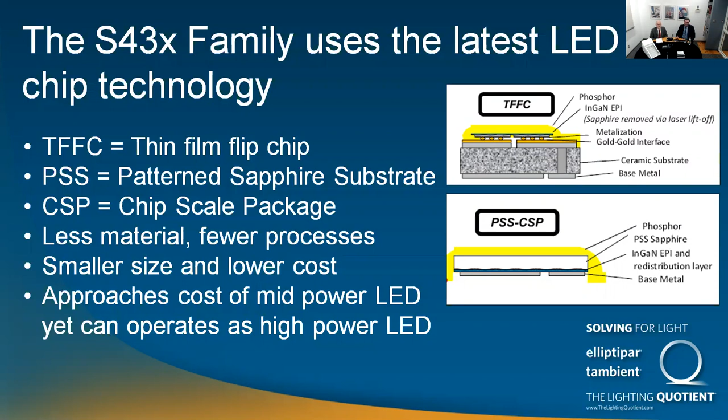Typical flip chip will diminish in light output as you ramp up the current density.

It will increase, but not at a linear rate, and that's what's known as droop. This chip will experience much less droop, so you can drive it harder and still get more light output.

The other thing unique about this chip is that it emits light from 5 sides. Rather than just the top emitting light, all 4 sides are emitting light too. This created a challenge for designing the optics, so we came up with a new optic design which still works around a single optical center, but it wraps completely around the LED so we can make use of all the light, including the light coming off the sides. This is a new optic, and we do have US and foreign patents pending.

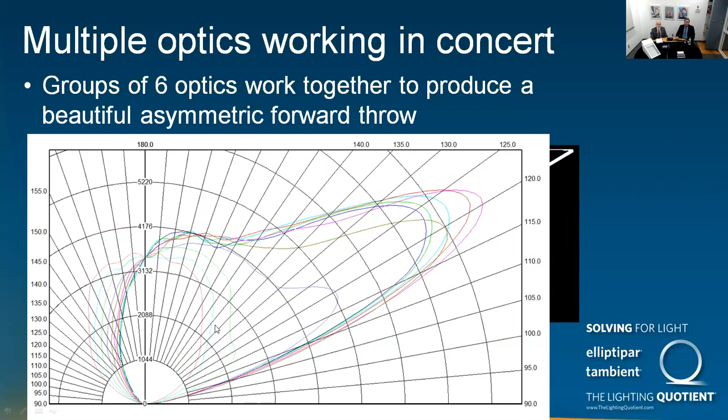Now, when we use them all together, in the case of the 430, we're using 6 of these optics in a row, kind of like stadium seating, so they can see over each other. It produces a nice asymmetric throw, very elliptipar-like, with a very sharp peak candle power that runs back quickly to 0, so there's very little wasted light downward or trapped by the visor.

This is a quick view of the light engine. You can see the chips are different than what you've probably seen in the past. They're very small. In this case, we're using 18 of the flip chip whites in series on a 6-inch board. The light engine itself is an extruded aluminum material. It's bright anodized, which helps with emissivity to release heat away from the LED, as well as reflect light that might otherwise go in the wrong direction, and reflects it back out of the fixture.

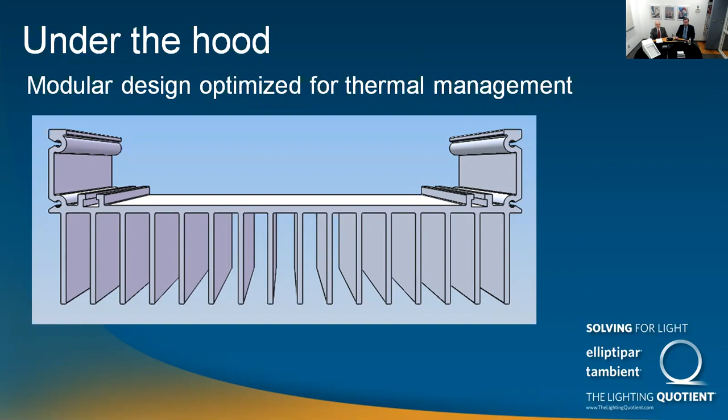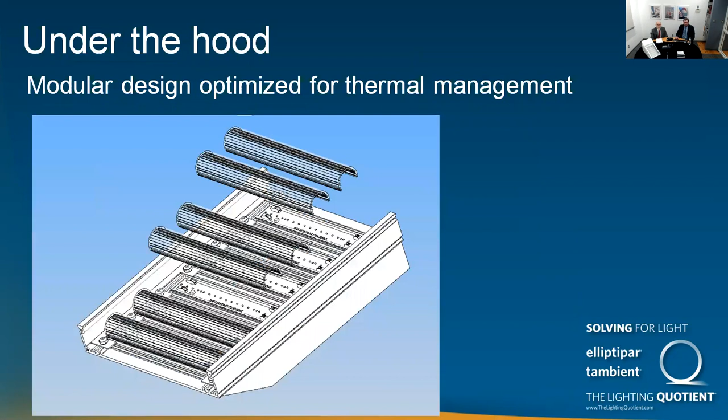Now, taking a closer look under the hood, it's a modular design. We're using a heavy extruded aluminum body to promote convection to cool the LEDs, and it's miter cut in the front, which we'll show you towards the end when we hold up the sample. The light engines are placed and mounted directly to the heatsink, and then the optics are placed over each individual light engine.

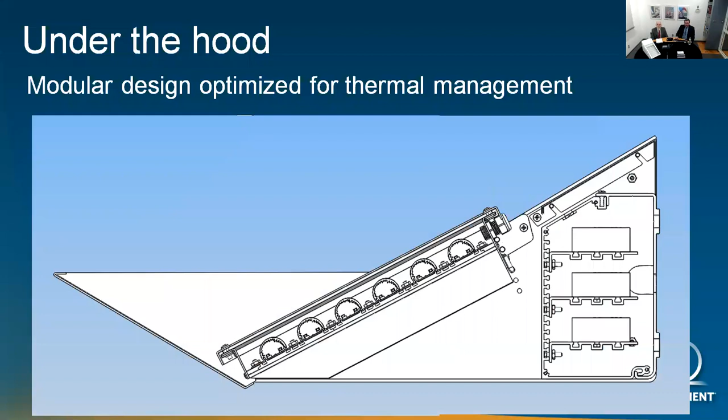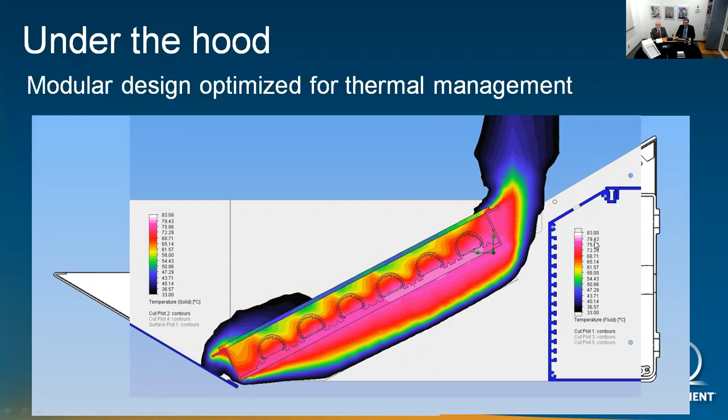This is showing all 4 of them in a 434. When we were designing it, we used SolidWorks, one of the programs we use, but it also has an add-on feature for FloWorks, which is thermal studies. This is one of the studies we were looking at when designing it, and you'll notice the highest temperature we're seeing is around 79, 80 degrees. When we actually built the fixture and measured the temperatures, it was spot on right at 79, 80 degrees. So it was good to see that the design efforts we put in at the beginning paid off in the actual design itself.

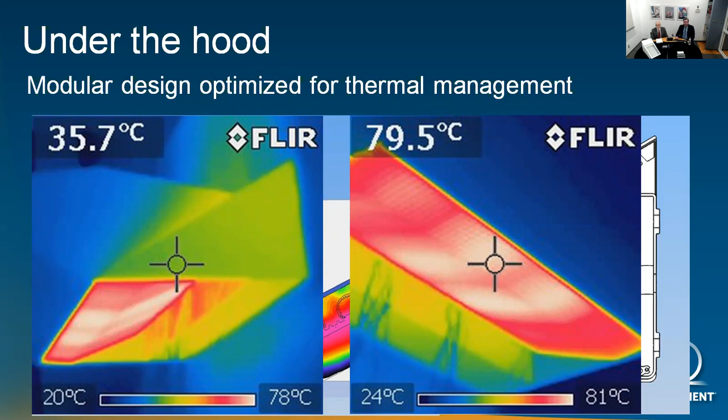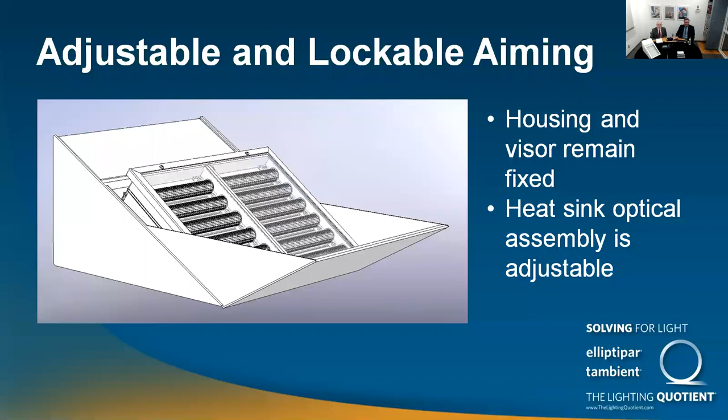The other feature we have, we call this an ensconce line, similar to the old ensconce where you'd have a shroud mounted to the wall and the optics inside were aimable, so you could aim it forward for shorter setbacks or longer throw. This unit does have optics that aim forward and back, locked in place with spring-loaded latches on either end, so we can lock it in place, but it's easy to adjust.

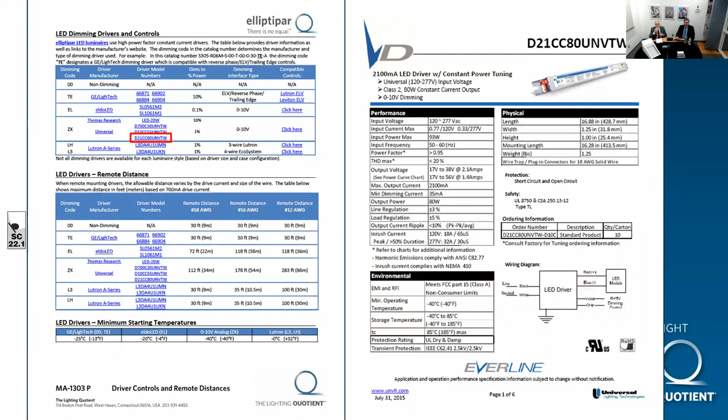Options, we went over those briefly. The OO option is no visor. The OP is for natatorium, pool, or damp use, which comes with a sealed door frame, and then there are the 2 different visor options.

Color temperatures are available in 2700 through 4000 in 80 CRI, but we also offer the 4000K in 70+ CRI. We can also do other color temperatures such as 5,000 or 5,700, but they are limited or subject to a minimum purchase that we would have to do. So quantity is a little bit sensitive, but just contact us and we'll let you know.

Destination requirement code is either for US or Canada. All the fixtures are CSA certified to UL 1598 as well as CSA for LED. The only real difference between the US and Canadian version has to do with the labeling that goes to Canada, some of which is in French.

As far as dimming, we have non-dimming, but we also have 0 to 10 ZX dimming, which dims to 1%, EL dimming, which goes all the way down to 0.1%, and LH, which is also Lutron A-Series dimming down to 1%, but it's for Lutron controls.

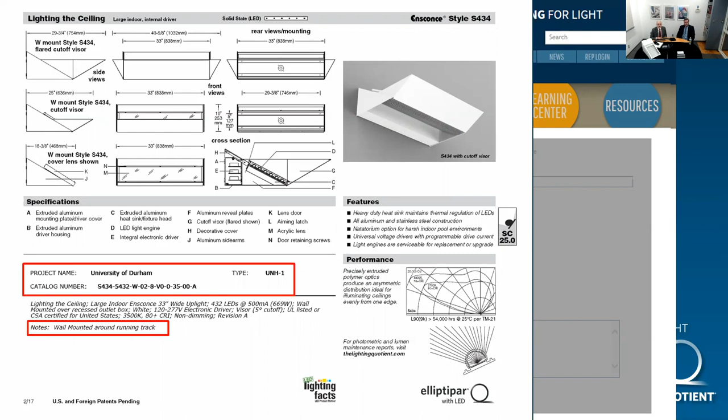And this is what you get - it's a slightly morphed version of the standard cut sheet. It will give you that project name and type along with a complete number that you've configured. Any notes you added will appear below the specifications. And on the back side, you'll get the completed catalog number along with the project name and fixture type.

I'm going to turn it back to Paul, who's going to take you through some of the testing and performance information behind this new series.

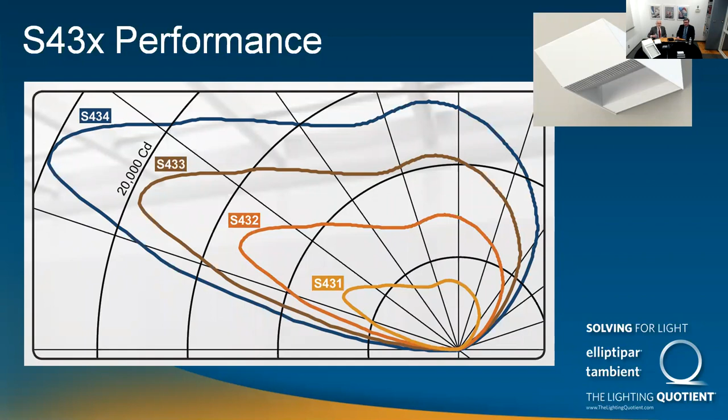Okay, so this is the overlay that we saw in the back of the cut sheet, and it's showing the 434, 3, 2, and 1 overlaid on top of each other - candlepower curves, which come from the LM79 testing.

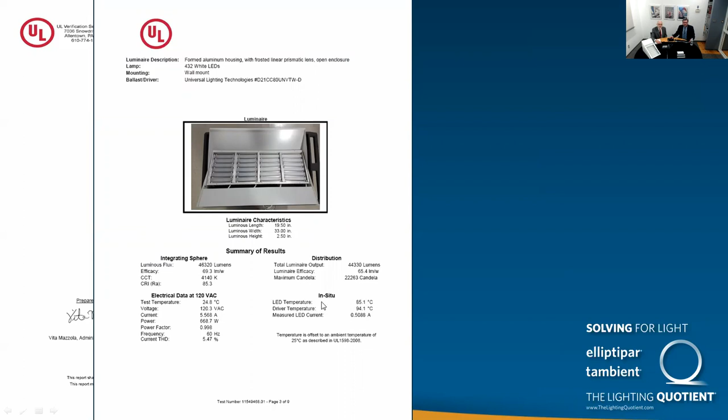It's an independent test lab, in this case UL, that we sent the 434 to. You can see the catalog number 434 with the straight visor and 4,000 Kelvin 80 CRI option. There's a photograph of the luminaire itself, as well as some results for the integrating sphere, electrical characteristics, and some in situ measurements, which we'll get into in a second.

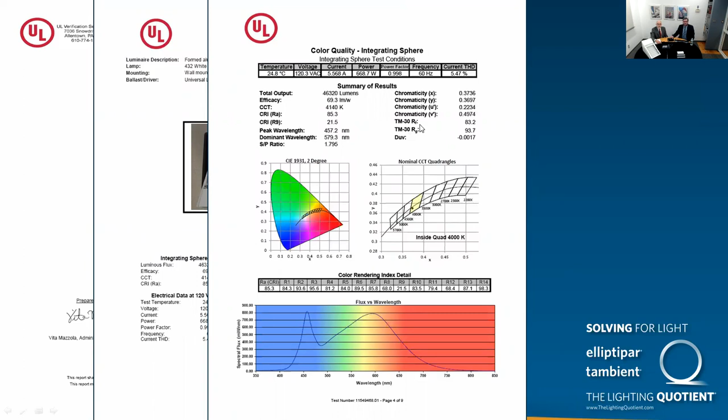The third page shows color quality. It shows the location on the XY chromaticity diagram. You'll have the total output for the fixture, the efficacy, the CRI, the R9. It also shows the TM30 values for fidelity and gamut.

On the next page you have your candle power curve, and the last page gives you the tabulated candela values. Now that all has to do with the fixture itself. Now we get into the chip itself. We talked about LM80 data, which is the lumen maintenance of the chip itself, rather than life, which we used to talk about with traditional sources. LEDs are going to diminish over time, so that's the proxy we use instead of life.

In this case, we're looking at the flip chip white. It's a Lumileds Luxeon product. This is driven at 700 milliamps in this test, and you have 9,000 hours of actual data, tested at 105 degrees C ambient. You can see the values as they're projected stay very constant over time. Typically a manufacturer will test to about 10,000 hours, and after that it gets too costly, and they're probably onto their next chip anyway, so you rarely see tests that go beyond 10,000 hours.

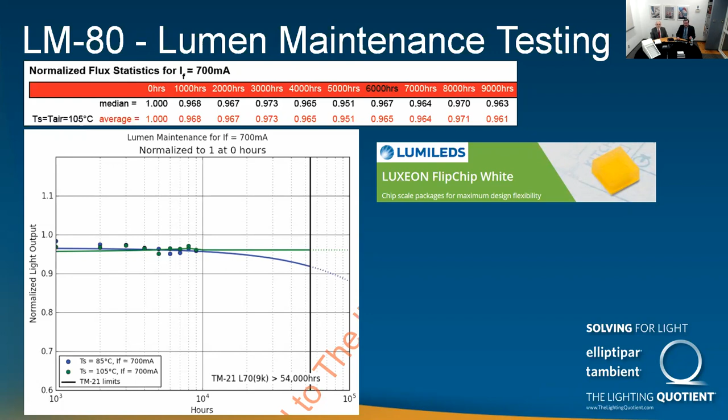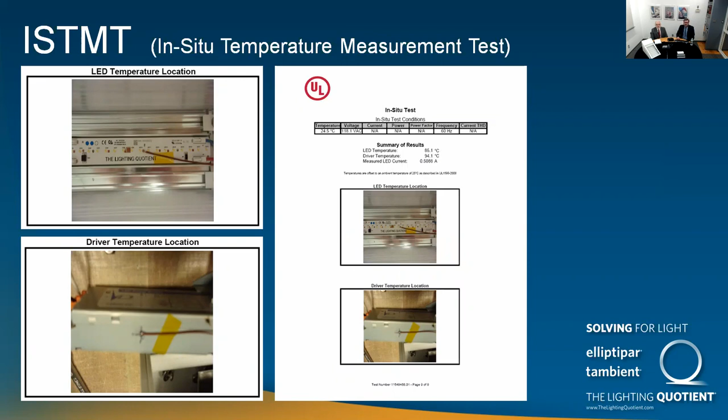In this case it's 9,000 hours, and that information is used inside the TM21 calculator, which I'll show in a second. The ISTMT is the in situ temperature measurement test, which is also done around the same time as the LM79. So what they will do is measure the temperature of the hottest LED in the fixture, as well as the driver itself. Now with this information, the LM80 data from the chip manufacturer and the ISTMT of the fixture itself, you can plug all this into the Energy Star TM21 calculator. It's a spreadsheet you can download from the Energy Star website.

Put in all the information, in this case the data for the 85 degree test as well as the 105 degree test, and the information that it was tested for 9,000 hours. This is the data for the 700 milliamp drive current testing at both 85C and 105C. So that's all the information for the LM80. The in situ inputs are coming from that test that I just showed you.

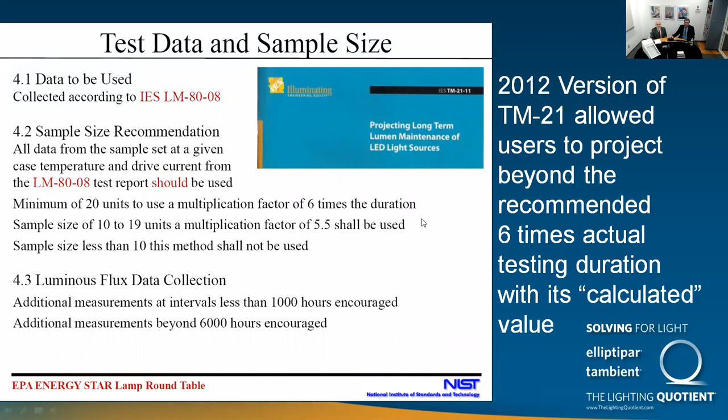The maximum LED temperature was 85, and now we were running at 500, so it's going to do an interpolation not only between the temperature but the drive current. When you put in 70, it's asking what is L70, or the number of hours to reach 70% of its original light output. In this case, the calculated hours, if you ran that line all the way till it reached 70%, is 319,000 hours. But you'll see the reported hours, which is greater than 54,000. This is because per TM21 you are not supposed to project or extend beyond 6 times the actual test duration. In this case it was 9,000 hours, so we will use greater than 54,000 hours.

This shows you the newer version of the TM21. The first version used to show the calculated values. They have since taken that down and put up a new version where it just shows the reported hours. In this case, I've changed the L70 to 90, to see how many hours before it reaches 90% light output, and in this case it was still greater than 54,000. The inverse of that is you can type in 50,000 hours and ask what is my lumen maintenance at 50,000. They both show the same thing in two different ways. This is saying at 50,000 hours you're going to have greater than 91% of your original light output.

All of this is really to explain what this means on the catalog page. Underneath all the thumbnail diagrams, you'll see this L90 9K greater than 54,000 hours, which means L90, how many hours to reach 90% light output. 9K means you have 9,000 hours of actual data, which is limiting it to 54,000 hours.

This S43X series really is sort of, I don't want to say the final step, but it's sort of been the next step in the evolution that we started back in 2015.

In February 2015, we announced the S104 series, our first so-called high-lumen product. At that time, the idea was to position it alongside other sources you might have used from Elliptipar for spaces such as this. When that product was unveiled, these were some of the images we used.

The B&O Railroad Museum used 70-watt ceramic metal halide, as did the Utah State Capitol in the upper center. The other two jobs, upper right, Booth Hill Elementary and the Jackson, Wyoming Airport, used 150-watt ceramic metal halide.

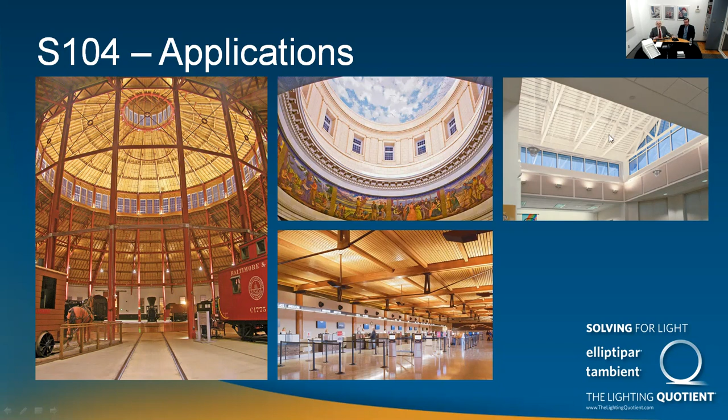It was really as part of the S104 that we started doing these comparison charts. For the 104, without getting into all the details, there were three sizes: 12-inch wide, 17-inch wide, and 24-inch.

We were trying to compare the available delivered lumen packages and color temperatures with either a traditional halogen source or a metal halide. For metal halide, we gave both initial lumens and mean lumens at 40% of rated life, because people often said they weren't trying to match the initial lumens but rather the mean or maintained lumens. Just so you know, these lumen values are delivered lumens.

What we basically did for these charts was go back to the old ITL reports and pull from them the information, essentially lamp lumens times luminaire efficiency, to arrive at what got out the door, because it's that delivered lumens we're now talking about with all the LED luminaire testing.

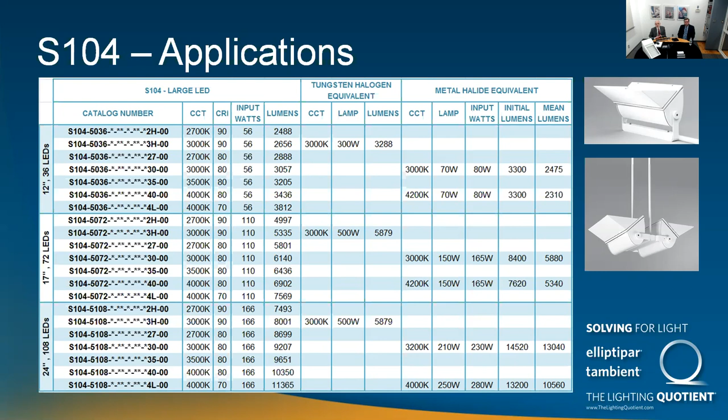So what you're looking at here is a chart comparing delivered lumens from a traditional fixture with an asymmetric distribution against a newer one. The bottom line was this family gave us tools that behave very much like a 70-watt, 150-watt, or 250-watt metal halide. Some of the early applications are shown here.

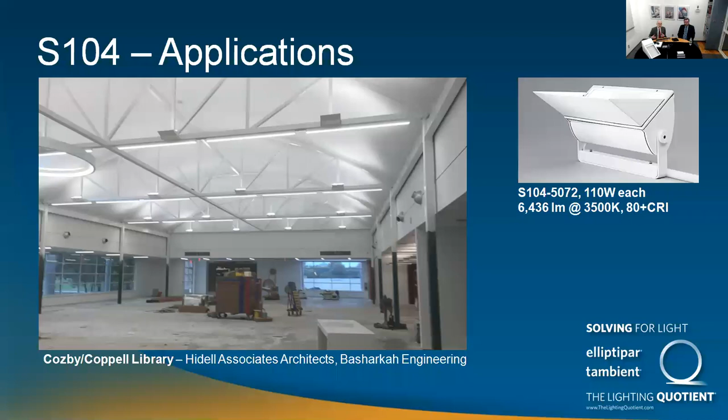While there were many applications like those where the 104 was a great fit, it couldn't take care of every space. A year later, last January, we moved into the S136 and 408, where we took the drivers out of the fixture head, put them in their own compartments, and made some wider units. Through the use of a higher drive current, now that the drivers were remote from the fixture head or in their own compartment, and with wider fixtures, we were able to ramp up the delivered lumens to handle spaces that had in the past used, say, a 315-watt ceramic metal halide up through a 400-watt pulse start.

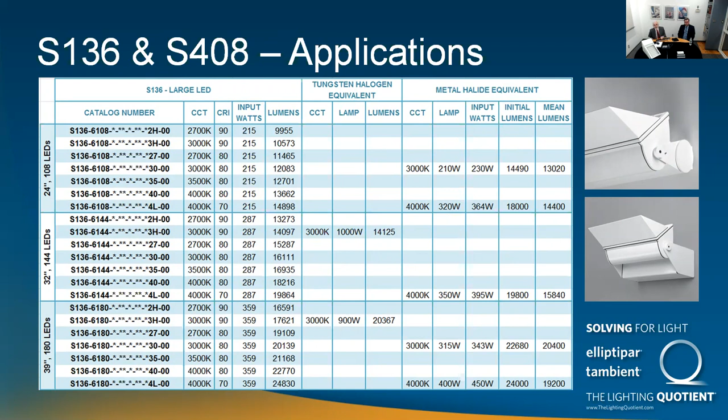Once again, we generated these tables to show that the 24-inch width was like a 210-watt elite lamp or 320 pulse start. The mid-size was like a 350 pulse start, and the widest, 39-inch, was like a 400-watt metal halide. As you can imagine, that took care of another group of spaces, but not spaces such as these.

So we knew that even with the 136 and 408, we had to get into that playing field. Once again, for each of the four sizes, we've generated these charts to compare to halogen sources, because we still get many inquiries from houses of worship with our halogen units wanting to replace them, as well as metal halide equivalents.

In this case, the charts, because they're for each size, aren't broken up by how wide the fixture is. It's whether or not it has a lens or visor, whether it's visor and no lens, or visor with lens, which is the most challenging in terms of getting light out through that secondary lens and dealing with the thermal management of having the unit enclosed.

For each chart, you'll see the same metal halide wattages presented against each of these options, whether it has a visor or a lens or not. Don't be surprised as you look at initial and mean values for each of those three choices, you may find them a bit higher or lower.

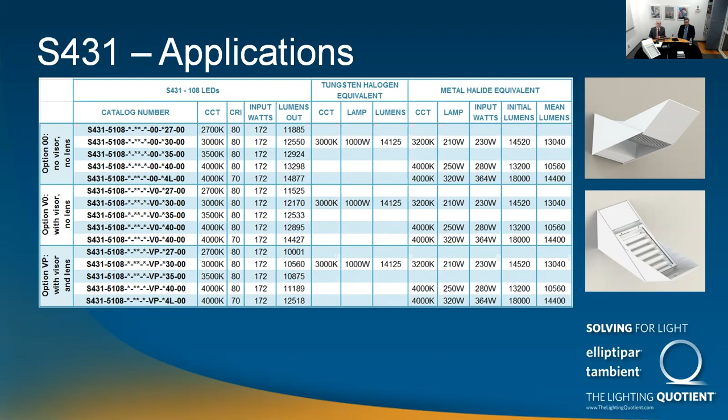And we just wanted you to see how each of those variations stacked up against the metal halide equivalent. So in this case, you're really looking at something that would replace a 210 through 320-watt metal halide or 1,000-watt halogen. Moving on to the double wide, that's a good choice when you're looking at either the 900-watt halogens, which were the GE lamp, like a 1,500-watt halogen output, or on the metal halide side, something between a single 315-watt, 350, or 400-watt metal halide.

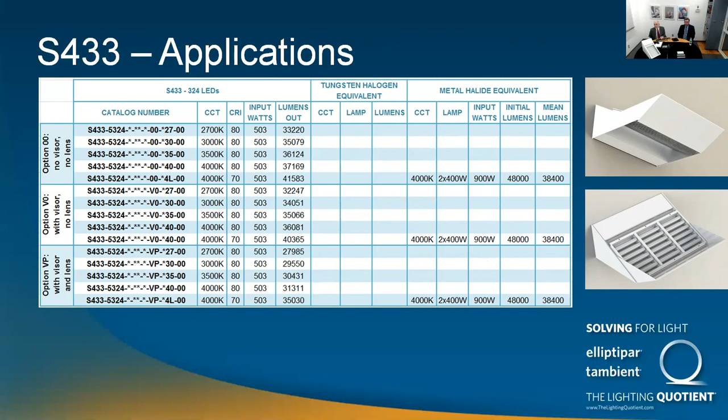The 433 would be suitable for some applications where you might have considered a dual 400-watt, and the 434, the largest unit now, would be a good choice where you're looking at replacing or as an alternative to a dual 400-watt or a single 1,000-watt. So we've been doing modeling of spaces with these IES files for a couple months now.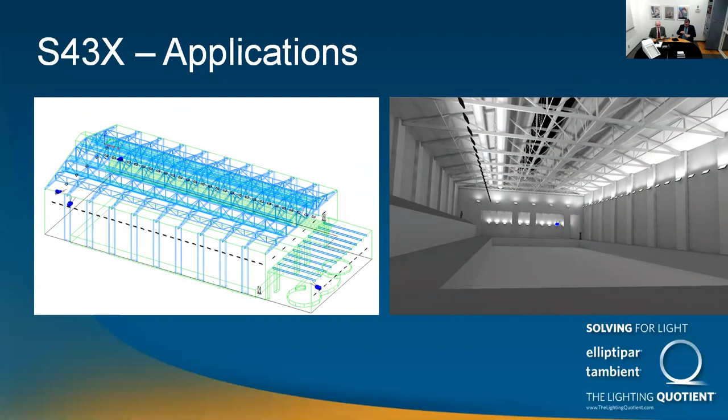I'm going to stop, if I can find the stop share. Red one. We're going to go back on full camera just so we can show you a few of the components up close. Okay, so this is the light engine extrusion itself.

This is looking at the extruded lens. This is actually in clear. This is one of the first prototypes that we had. It snaps right onto the light engine. And as you can see, it's centered on the LED itself.

So in this case, you'd have two LED boards and two optics. Now we played around with some diffusion, and we got it just perfect so that we can avoid having to use that secondary holographic film that we've been using in the past. So having the diffusion incorporated directly into the optic has helped that a lot.

In front of Zach, you'll see the 431, the 1 wide. It has 6 light engines or 6 LED boards going off. This is the one with 108 LEDs, and this will be similar to what the regional sales managers will have as samples.